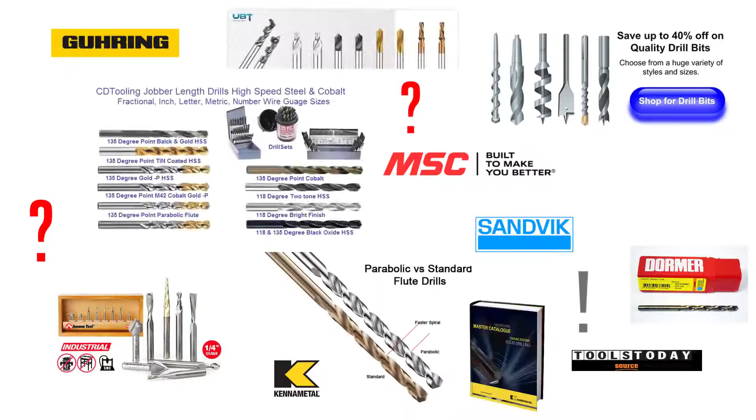When it comes to twist drills, selecting the right one can be overwhelming. From cheap no-name drills to high-end special helix, solid carbide through-tool drills, the choices can seem endless. In this video, we're focusing on getting value from your drilling operations, with the basic knowledge you need to select the right drill and some tips for getting the most out of each of your drills. So let's get started.

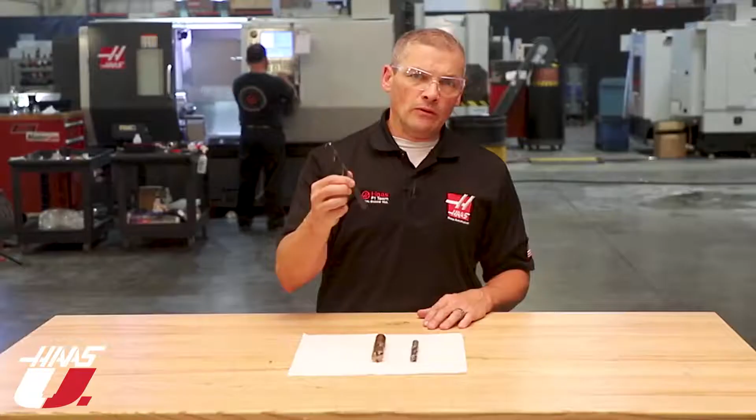Three basic things separate one drill from another: material, coating, and geometry. Let's start with the material your drill is made from. High-speed steel is the most basic, least expensive general purpose drill material. It's very forgiving in drill press and hand drilling operations, and they can be resharpened to extend their life.

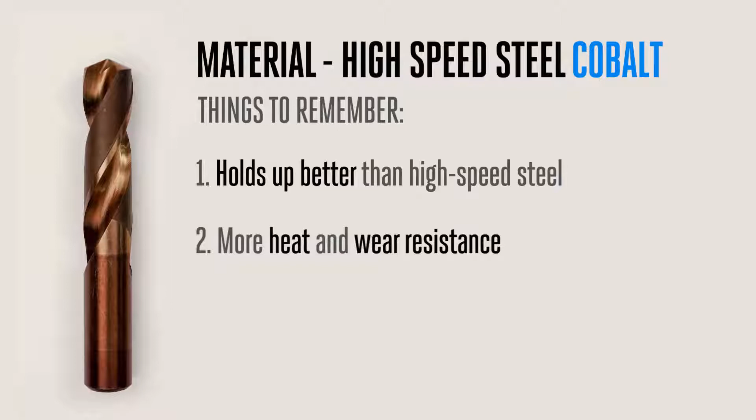Next is high-speed steel with cobalt added, which holds up better than generic high-speed steel. Cobalt gives high-speed steel more heat and wear resistance, and these drills can still be easily resharpened, similar to high-speed steel. Carbide is the most expensive but longest-lasting drill material.

There are different grades, with the most expensive drills usually giving the best heat and chip resistance. Carbide also allows for coolant through holes to be added to the drill. These through-tool drills are primarily for deeper holes and tough-to-drill materials, where the high-pressure coolant flowing through the tool flushes chips out much better, keeps the cutting zone cooler, and provides extra lubrication to prevent wear.

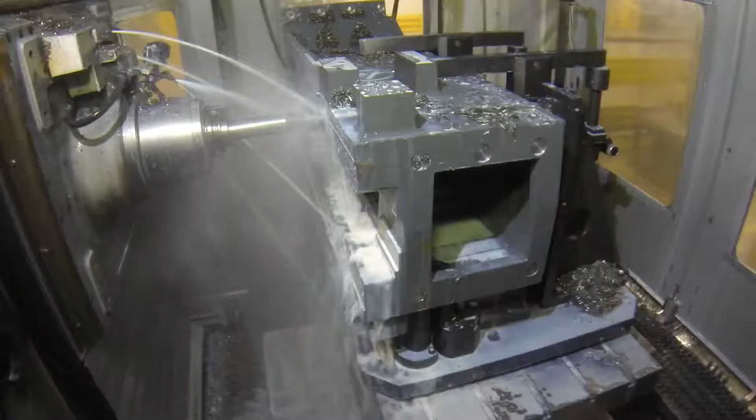While all these drills will cut a hole in most materials, the carbide drills will outlive cobalt by a factor of 10 or 20 times in a rigid CNC machine. In other words, if a cobalt drill will cut 100 holes, the carbide drill will cut 1,000 or 2,000 holes before needing to be resharpened. Here in the factory, with a properly dialed in drilling op, we have examples where we're getting 5,000 plus holes in cast iron from just one drill.

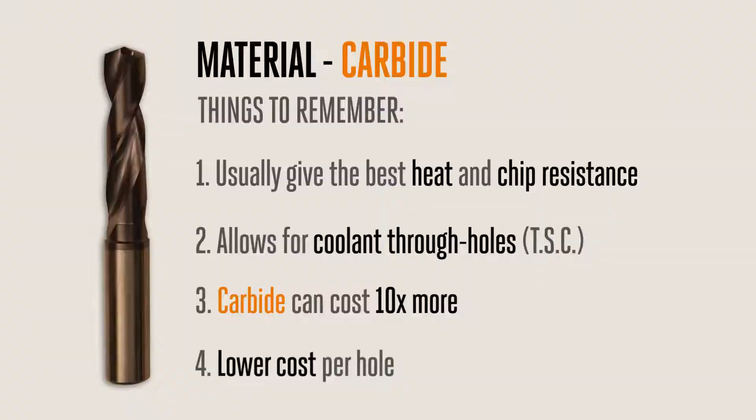All that said, a carbide drill can easily cost 10 times more than a cobalt drill, so the investment is a lot higher. Despite the high price, the cost per hole when using carbide will usually be the lowest, since it can produce so many more holes. Also, because carbide is typically capable of running 3 to 5 times faster, the decreased cycle time to produce those holes goes right to your bottom line.

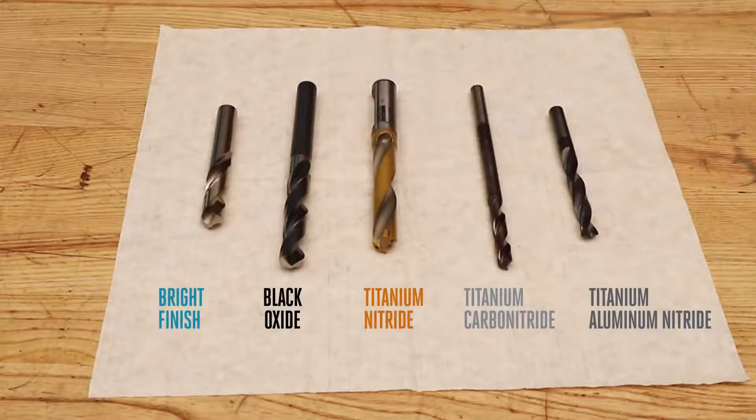Now, let's talk about selecting the proper coating for the material you're drilling. This decision can really influence performance. I've lined up a few examples here on the table so we can get a good look at the differences. Bright finish is the cheapest option and fares well in certain applications. For example, low carbon steel and aluminum can both be drilled with a bright finish tool, usually without problems.

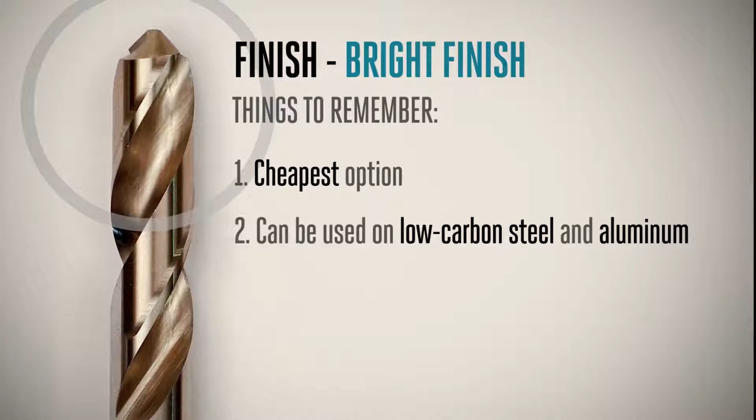Black oxide provides an advantage over bright finish in that it has a bit more lubricity, often more resistance to oxidation, and an additional heat treatment that can offer upwards of 50% longer life while still keeping your tooling costs low. Titanium nitride, abbreviated TIN, is the most common coating and is a great entry-level coating for applications where lots of heat won't be transferred to the tool from cutting harder or tougher materials.

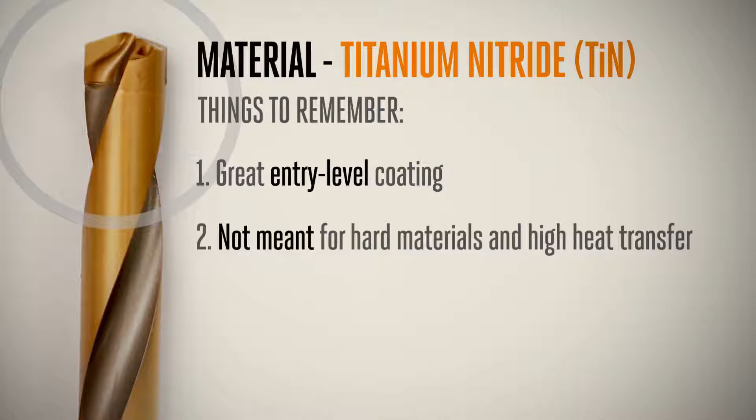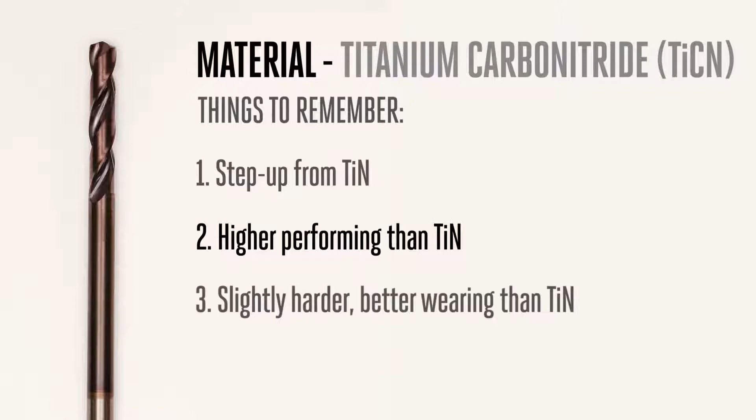You can tell titanium nitride by its bright gold color. Titanium carbonitride coating, abbreviated TICN, is a step up from TIN and provides a higher surface temperature. Slightly harder and better wearing than TIN, it's typically bluish or purple in color.

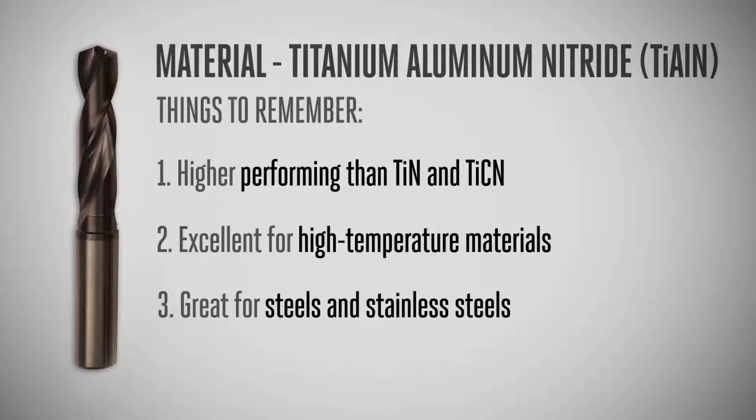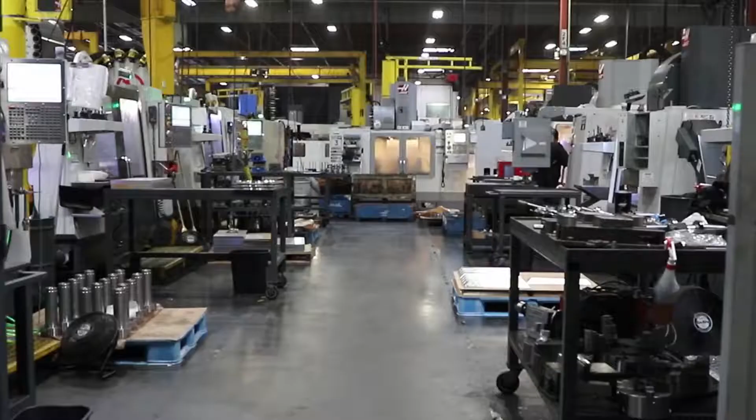Finally, titanium aluminum nitride, abbreviated TIALN, has a much higher surface temperature rating than TIN or TICN. This gray-colored coating is excellent for your high-temperature materials and still a good choice for steels and stainless steels. But because of the aluminum content, it isn't a good choice for drilling aluminum. Beyond these common coatings, many manufacturers have proprietary ones of their own that tout features like high lubricity and extremely high surface temperature range. Here at Haas, we use TIN coated drills mostly when we're working mild steel, where the increased hardness and heat resistance equals long life.

We move up to TICN coatings for drills used on cast iron, where it shows good toughness and resistance to chipping. And when we're cutting high-strength, harder steels, we'll step up to the high-end TIALN coatings to handle the heat and high stresses, where the coating helps reflect the heat back into the chips, away from the tool and the workpiece.

Generally, unless you're cutting difficult materials, a good quality cobalt drill with a TIN or TICN coating is a relatively inexpensive way to get higher productivity. Also, do some shopping around. Pricing varies a lot, and you can find drills with high-end coatings at decent prices.

So we've talked about materials and coatings. The third key ingredient to choosing the right drill is geometry, which plays an equally important role in drill performance. Probably the most obvious aspect of drill geometry is the drill's length.

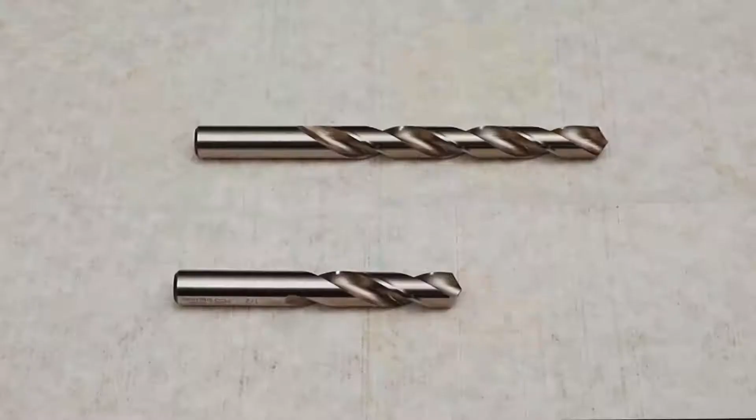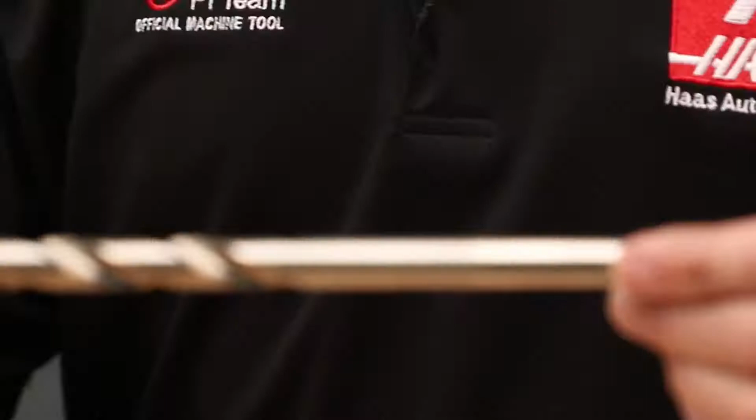Drills come in two common lengths: screw machine length, commonly referred to as stub length, and jobber length. When it comes to drilling on a CNC, stub length drills are the most common choice because they are more rigid. There are, of course, all kinds of custom lengths available for special applications.

As with any cutting tool, you want to use the shortest drill length possible, because the shorter the bit, the more rigid it is. Just make sure you have enough flute length to get the chips out of the hole.

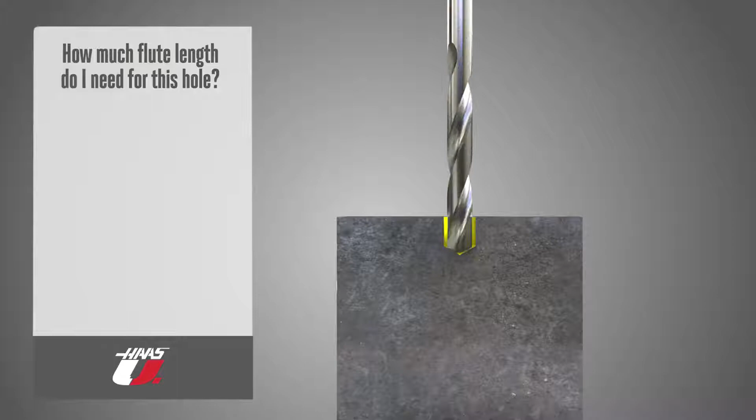Turns out this is geometry question number 2: how much flute length do you need for the hole you're drilling? Ideally, you want 2 times the drill diameter in flute length above the hole when the drill is at the deepest point in the hole. This allows for chip evacuation.

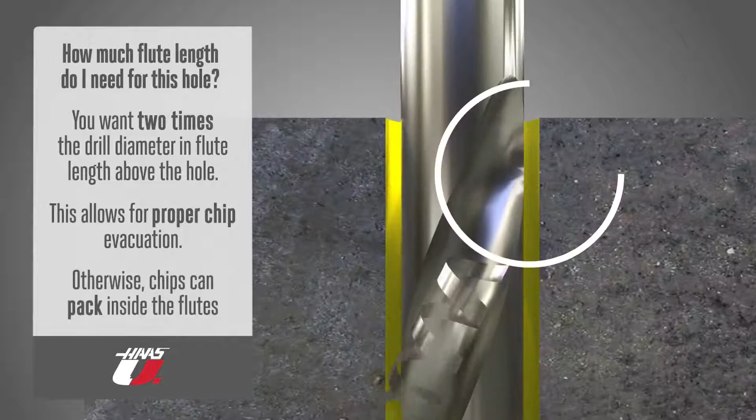Less than this, and chips can pack up inside the flutes and cause poor surface finish, hole size, and straightness issues. Or worse, they break the drill. But you also don't want a long jobber length drill with flutes all the way up if you're just drilling shallow holes. This drill won't be as rigid and will yield less precise hole position.

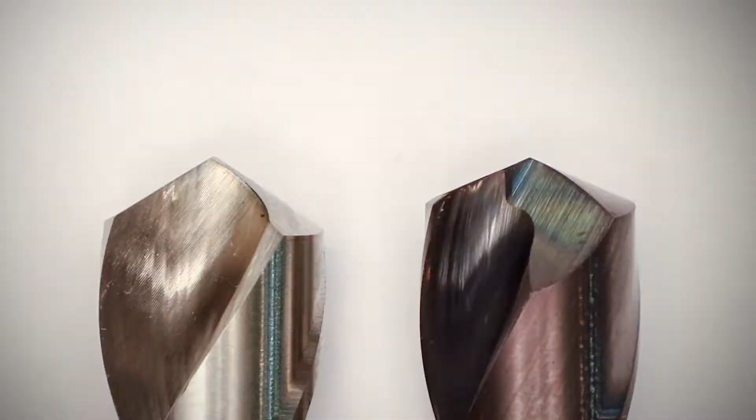The drill point angle is probably another familiar aspect of drill geometry for most people. When you're drilling metal on a CNC machine, you're generally choosing between a 118 degree point and a wider 135 to 140 degree point. The 118 degree point is most common on general purpose high-speed steel drills made for cutting mild steel, aluminum, and other soft metals.

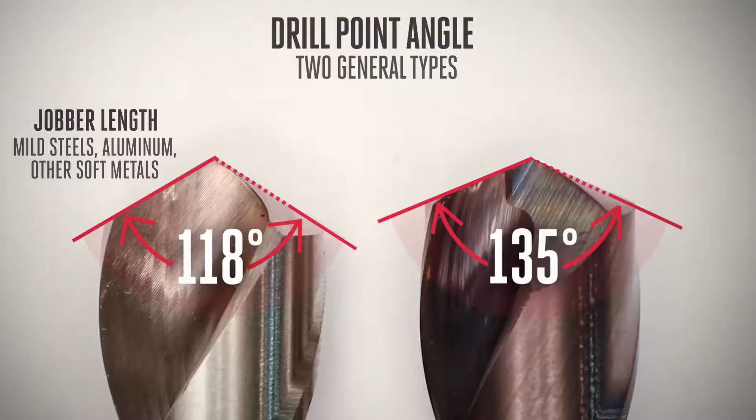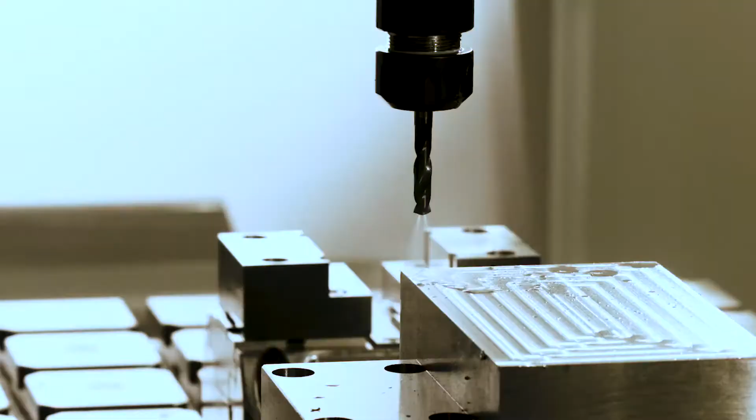And it's what you'll usually find on regular jobber length drills. The 135 degree point is more typical for stub length drills aimed at CNC machining and harder, tougher materials. Here at HAAS, almost all the drills we use have 135 degree points when we're cutting cast iron and harder steels. Next up, we want to consider the helix angle of the drill.

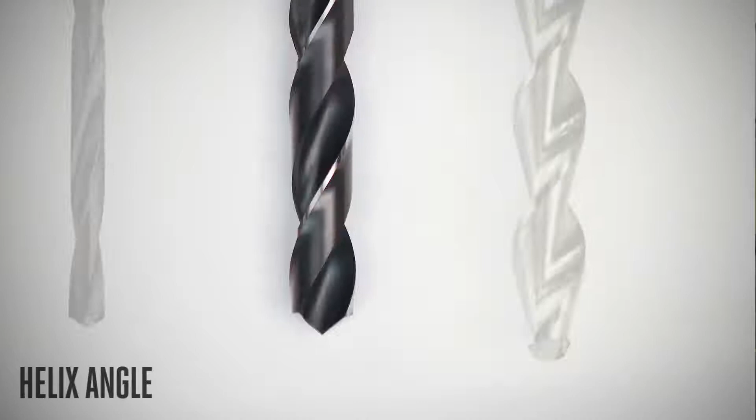This is important for proper chip clearance. Typically, helix angles in the 30 degree range are used for general purpose drilling in most materials. Most of the time, these will work just fine and you won't need to concern yourself with other options.

But if your application calls for some specialization, small helix angles below 30 down to around 10 degrees are usually selected for harder steels and aluminum alloys, where good chip evacuation, fracture resistance, and edge strength are important.

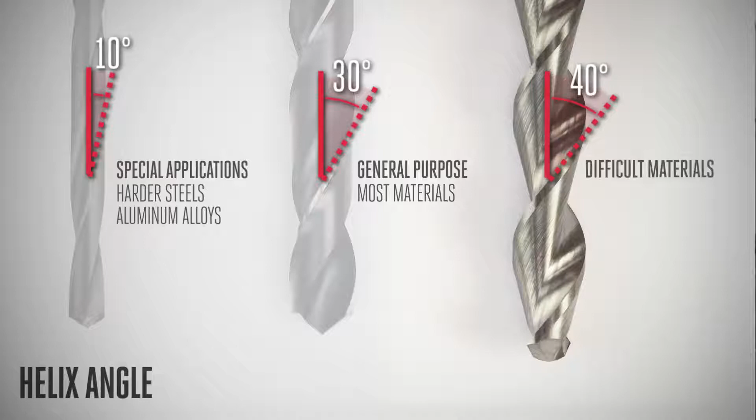On the other end, large angles up to 40+ degrees are often used for drilling difficult to machine materials like stainless steel, where low torque requirements and cutting resistance help cut these tough, gummy metals.

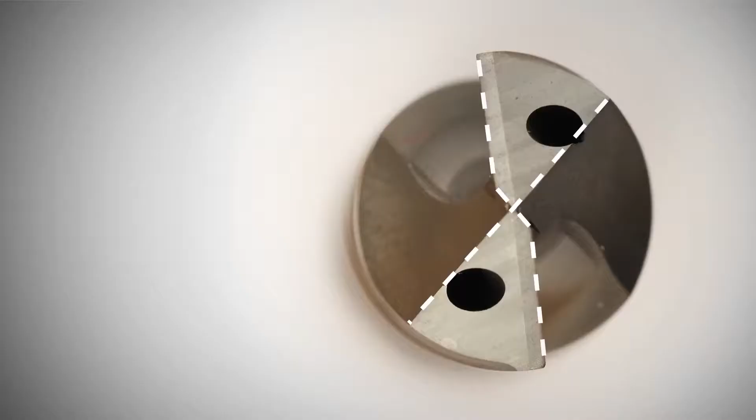Last on our geometry list is the self-centering point. This is found on many cobalt drills and almost all carbide drills. This eliminates the need for a starting drill and helps drill in true position.

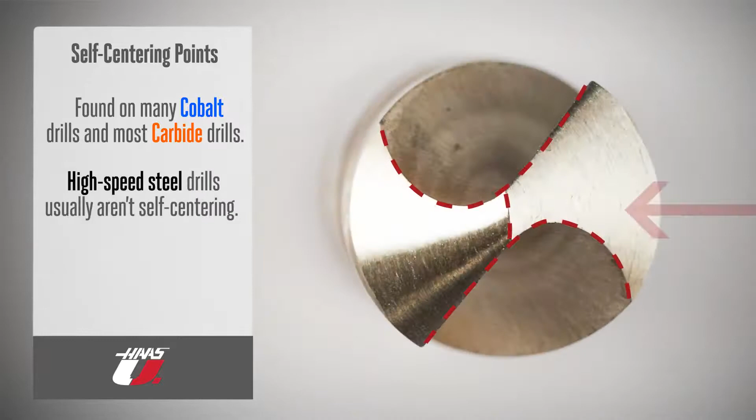Regular high-speed steel drills aren't usually self-centering, since it's more time-consuming and expensive to grind them with this feature. Because of this, they tend to walk or wobble when they are trying to cut into a flat surface.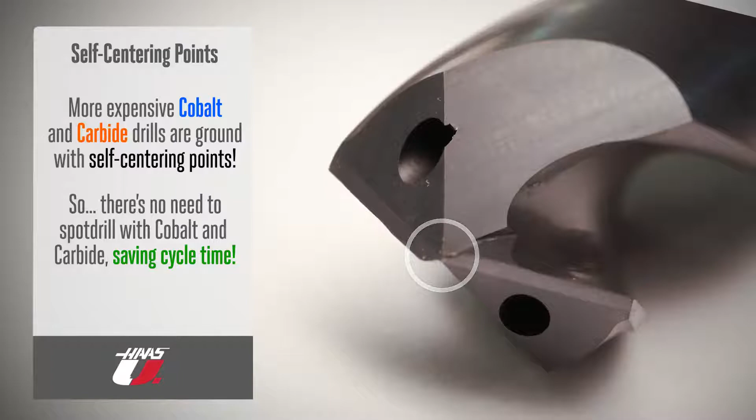More expensive cobalt and carbide drills are ground with this self-centering point, allowing them to start cutting very easily with very little tool pressure. This virtual self-centering means there's no need for a spot drilled hole, and it's another way these expensive drills can be more productive than their economical brothers. Not spot drilling every hole saves lots of cycle time.

Okay, we've looked at the basics: materials, coatings, and geometry. Now, let's get into some specific cutting condition and application related tips. As we mentioned, drill manufacturers can put holes

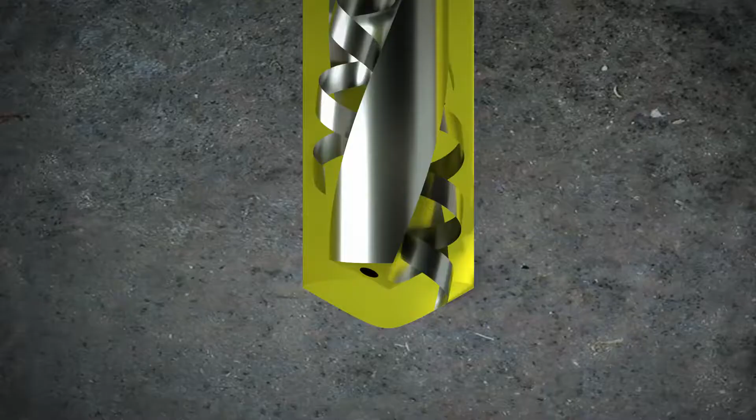through the drill so coolant can get delivered right to the cutting edge down in the hole. This keeps the cutting zone cool, lubricated, and greatly aids in chip evacuation.

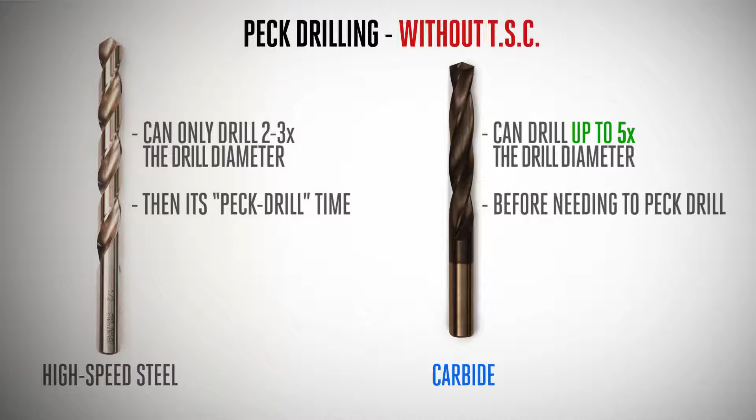Typically, steel drills without through-tool coolant can only drill about 2 or 3 times their diameter deep before requiring you to peck drill to remove the chips and get more coolant down in the cutting zone. Good carbide drills without through-tool coolant can drill up to 5 times diameter deep in carbon steels and aluminum before needing to peck drill. The problem with peck drilling is that most tool wear occurs when the drill is entering the material.

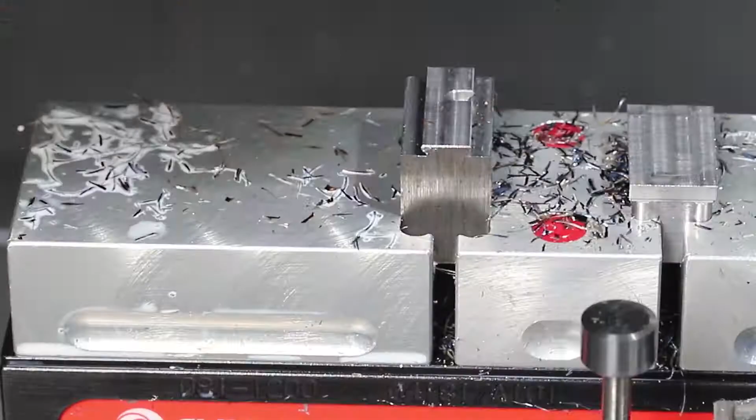Once the drill is in the cut, wear rates become very low. Peck drilling significantly increases tool wear because you're restarting the cut multiple times per hole. Not to mention all the extra time spent pecking each hole, where the TSC drill would do it in just one pass. So for holes more than 5 times depth, and particularly when drilling tough or work-hardening materials, TSC and through-tool drills really become a necessity.

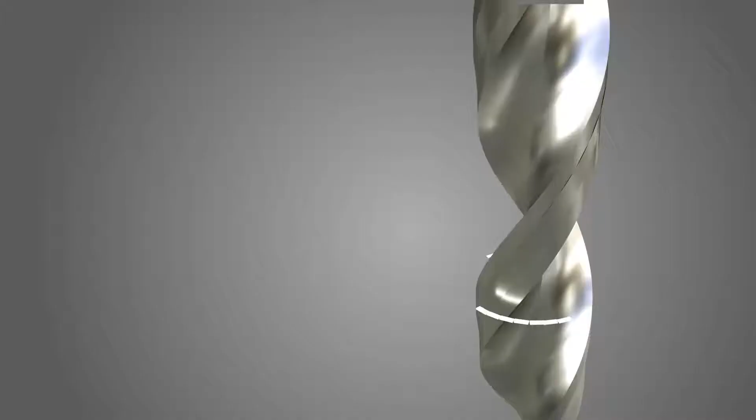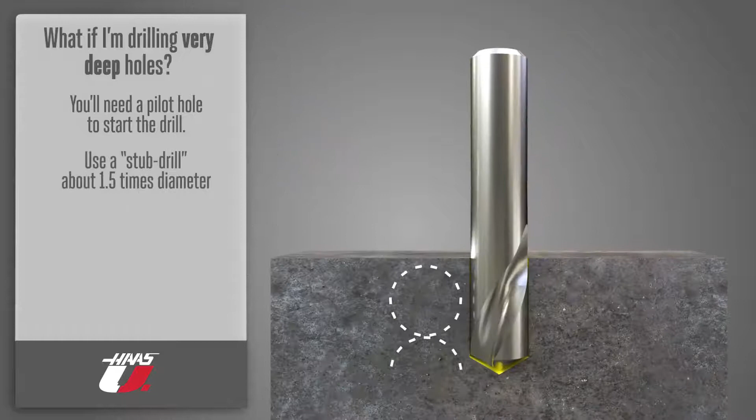If you need to drill very deep holes, let's say 8 times diameter or greater, you'll usually need a pilot hole to start the drill. Typically this is done by using a stub drill to cut the hole about 1.5 times diameter deep. Then start the long drill with the spindle at 300 to 500 RPM and slowly feed it into the pilot hole. Once the drill's main diameter is in the pilot hole, you can crank up the RPM to full speed and finish drilling to full depth.

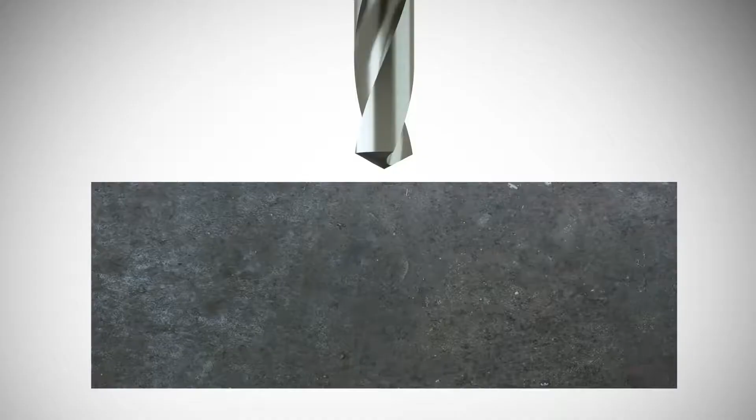When drilling holes that break through the workpiece, pay special attention to the material and cutting conditions. Drill manufacturers recommend slowing the feed rate before the drill point breaks through the material to prevent chipping and reduce heat in the cut. We want to reduce the heat because as the drill gets to the very bottom, before it breaks through, the material is very thin and there is no place for the heat to go. So that last bit of material can work harden, literally heat treating the material. Breaking through this heat-treated layer can shorten the life of the drill. A 50% reduction in feed rate for the final 2 millimeters or 80 thou before the drill point reaches the bottom usually eliminates this issue.

So when does a drill need to be sharpened? Generally speaking, as long as your holes are in tolerance, if wear and chipping are less than 0.5 millimeter or 20 thou, it's okay to continue using the drill. After that, it's typically time to resharpen or regrind. Pay close attention for chipping on the drill margins. If the wear is even, it's okay to regrind. But if it looks like this, the drill is no longer useful.

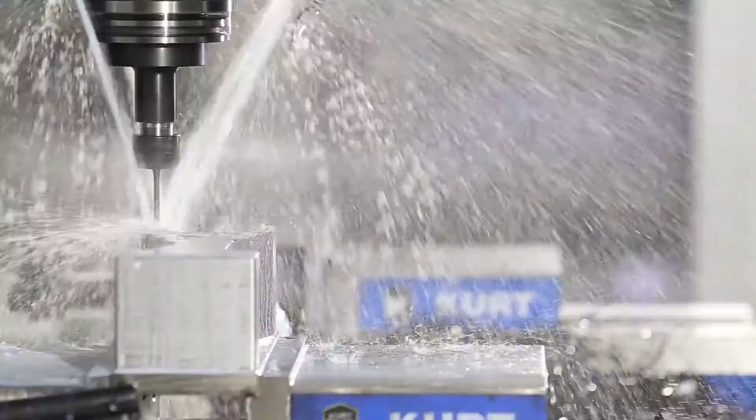Now oftentimes you'll be buying tools and deciding what you should spend on a specific job. Is it a short run single lot, or is it a large recurring job with thousands of parts? Carbide might not be the best investment if you've got a short run and you can't spend extra time dialing in your cutting parameters. High-speed steel or cobalt might make more sense in this case. Keep in mind that you can always start with less expensive drills to get the job launched. Then if you end up making lots of those same parts down the road, you can work with your tooling supplier to find the best tool for the job, whether it's carbide or a high-end cobalt drill.

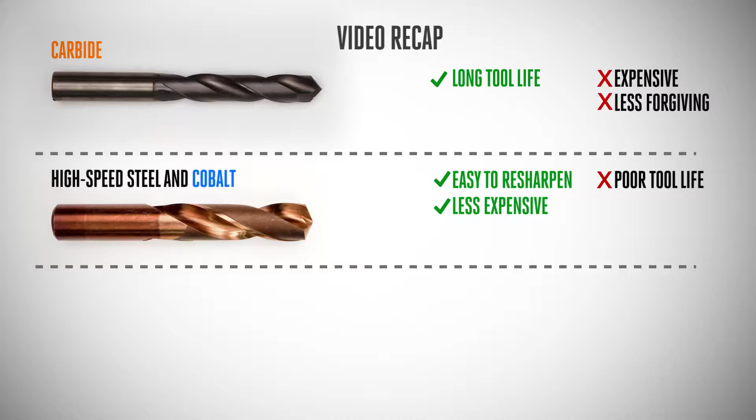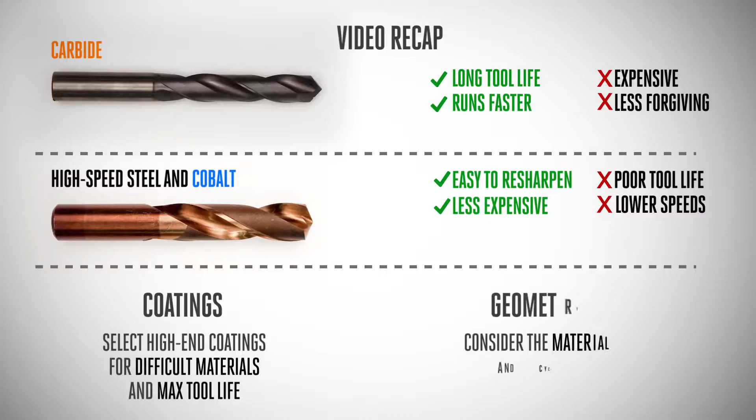So let's do a lightning fast recap. Carbide is much more expensive than the others. It's also less forgiving if used incorrectly. High-speed steel and cobalt are easy to resharpen, but don't offer anywhere near the tool life of carbide. Typically, carbide can also run significantly faster. When it comes to coatings, if you're machining difficult materials or need max tool life for long part runs, then select the high-end coatings. And for geometry, we're just touching on some of the aspects, but consider the material and your cycle time requirements when deciding which way to go with each of these elements.